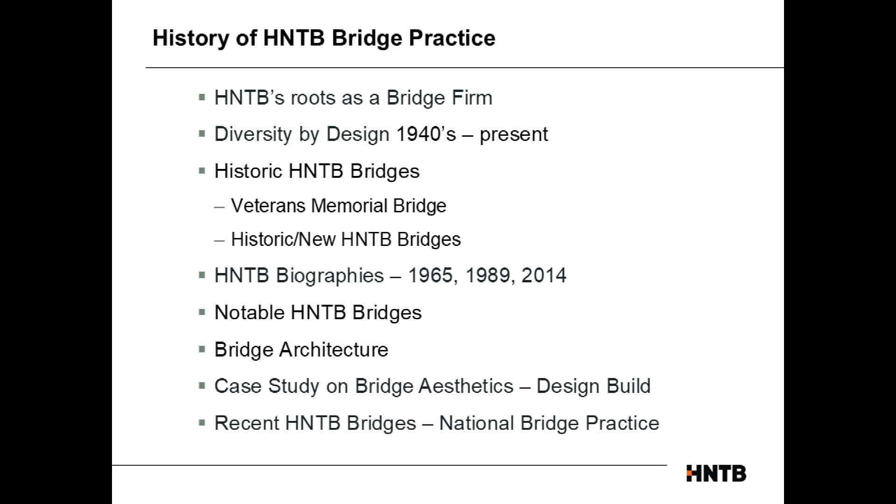So that's where it gets more of the glamour, but then the bridges, which is what I'm going to talk about—HNTB started out as a bridge firm over 110 years ago, and it has diversified over the years. So there is a rich history of bridges and how that firm started. I'm going to follow this agenda, and I may wander off, so let me know if I do. HNTB started out as a bridge practice, and the roots of our practice trace to a bridge engineer named John Alexander Low Waddell. He was originally from Canada, educated in the US, and then worked as a draftsman for the Canadian Pacific Railroad.

He practiced and was also a professor of civil engineering in Japan. But then he opened up a practice in Kansas City in 1886, and then in 1892 he started doing more bridges. Almost all the bridges over the Missouri River at that time were Waddell's influence. One of the famous bridges he did during that time, in 1893, was the South Halsted Bridge.

In Chicago, Illinois. Again, most bridges at that time were railroad bridges. Cars were not invented yet, so the railroad is what kind of drove the building of a lot of the bridges in the U.S.

Again, Waddell, when he was starting his practice, needed partners as it grew. One of his first partners was a gentleman named Ira Hedrick, in 1899. Then in 1901, Ernest Howard, which is the H of HNTB that I'll explain later on. A gentleman named Louis Ash joined the firm, and then Ira Hedrick left. Then John Harrington joined in 1907. He's another name that is also well known in Kansas City. This is John Harrington.

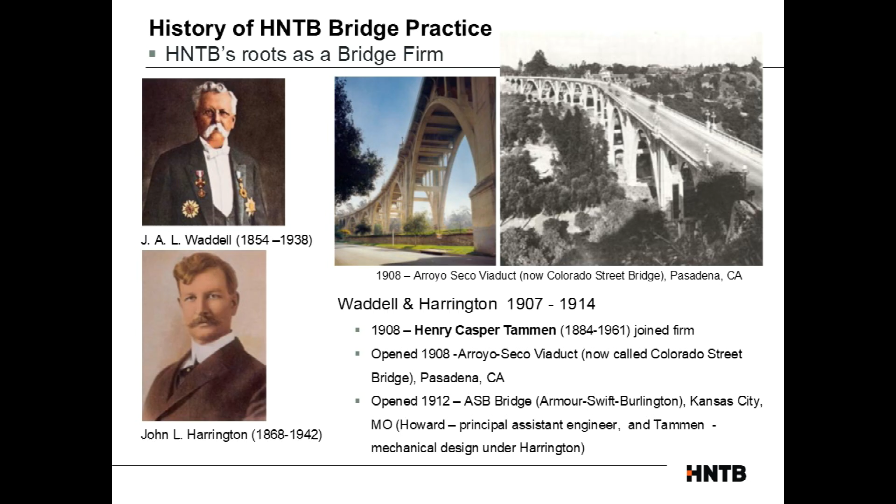This one here is the Arroyo Seco Viaduct, now called the Colorado Street Bridge. This bridge in Pasadena is still standing. It's been featured in several movies—I think the recent one was La La Land, where they were walking along the bridge. And then here in Kansas City is the ASB Bridge.

That's the one that opened in 1912, and ASB stands for Armour, Swift, Burlington. Most people may know, if you're old enough and live in the area, that this used to be a double-decker bridge that served vehicles on one deck and the railroad on the other. So they had the railroad on one area and the roadway bridge on another deck.

It was like that for the longest time, until they built the Heart of America Bridge, and then they ended up taking down that bridge.

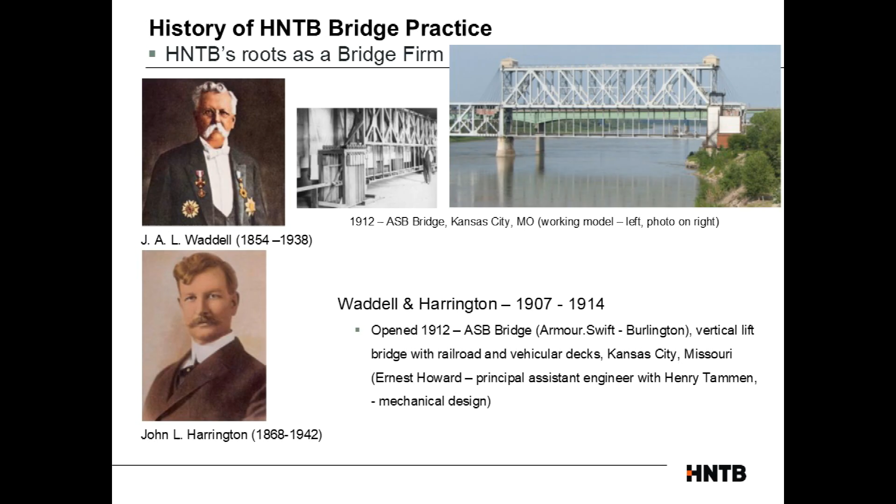They also did this in Cleveland, called the Detroit Superior Bridge. That was in 1917, and currently it's been renamed the Veterans Memorial Bridge. I will say later on I'll talk about some of the restoration work we've done to keep it going.

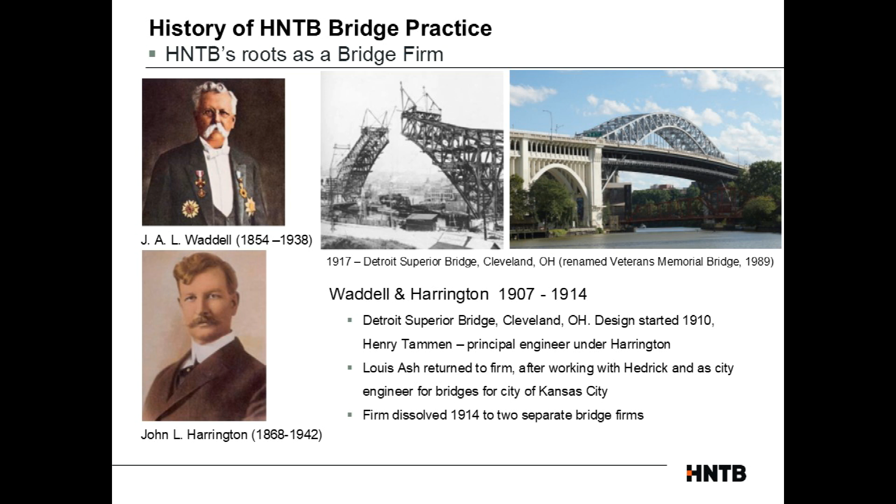So again, that started in 1910, and then Louis Ash was another engineer who left and came back and worked there. Then in 1914, there was a split. You've got two engineers with very strong personalities and egos, and at some point there's going to be a rift, so that's kind of what happened.

Waddell ended up leading the firm. He formed a partnership with his son Needham, and also had a gentleman named Hardesty who worked there, and then he ended up moving to New York. Today that firm is called Hardesty and Hanover, which is also a very premier bridge engineering firm based out of New York.

Harrington ended up forming a firm called Harrington, Howard, and Ash. The original start of that firm is dated 1914. Ernest Howard and Louis Ash were made partners at that time.

And then the bridge there is called the Steel Bridge, in Portland, Oregon, dated 1914. Apparently both HNTB and Hardesty will claim that's their bridge. There's a little bit of a battle, but both websites will mention that, even though Waddell wasn't with that firm anymore, it was designed at that time.

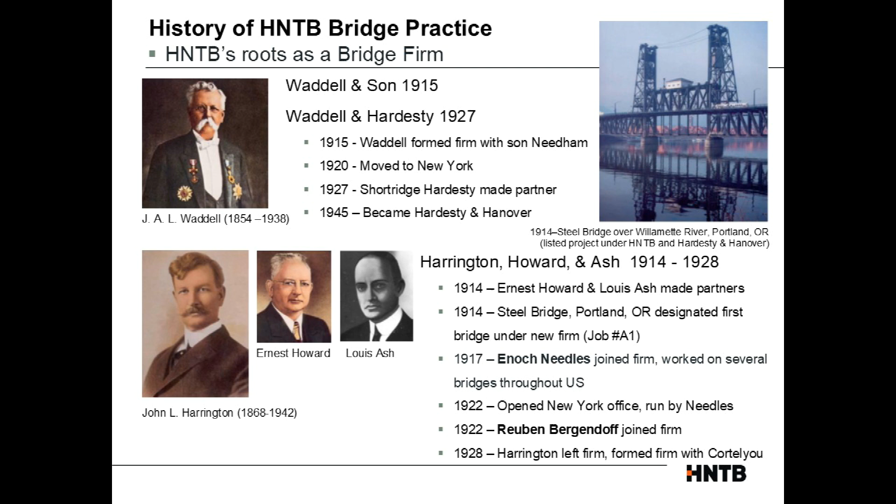Later on, in 1917, Enoch Needles joined the firm, and later Reuben Bergendoff joined as well. At some point Harrington got into a disagreement with the new partners and ended up leaving. He formed a firm called Harrington and Cortelyou that, from 1928 to 2000, operated primarily as a bridge firm but never got that big—mostly local bridges. In the end they were acquired by Burns and McDonnell, so now Burns and McDonnell have a bridge division that was part of Harrington and Cortelyou.

And then the remaining firm was called Ash, Howard, Needles, and Tammen. Tammen was made partner, and then in 1929 the stock market crashed.

And so you're talking about one of the partners, Bergendoff, it's like he had to leave. He was laid off because there was a lack of work.

And this bridge, the Vicksburg Bridge, again, we started doing a lot of bridges over the Mississippi River. And the main partner, Ash, ended up dying prior to the opening of that bridge because he was stubborn and wanted to check certain things when they were building the piers. He ended up suffering the bends from going down deep. That was something that, when you start building bridges, you've always encountered at that time, and people didn't know about it.

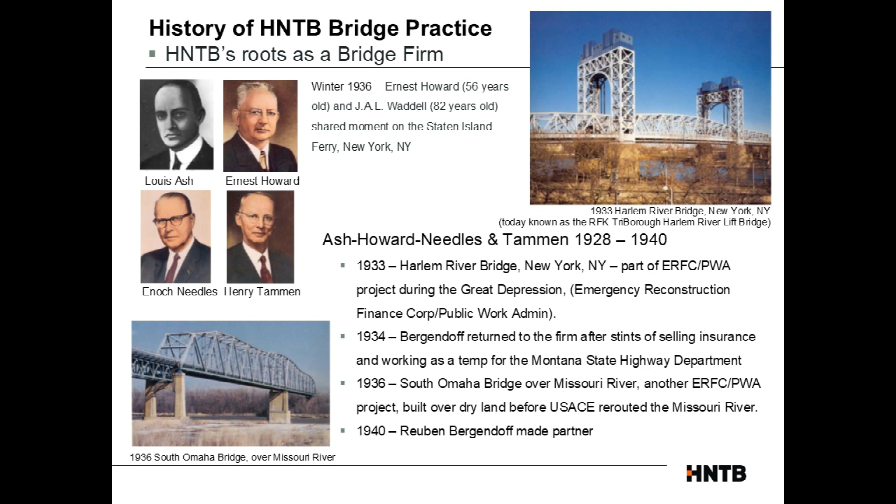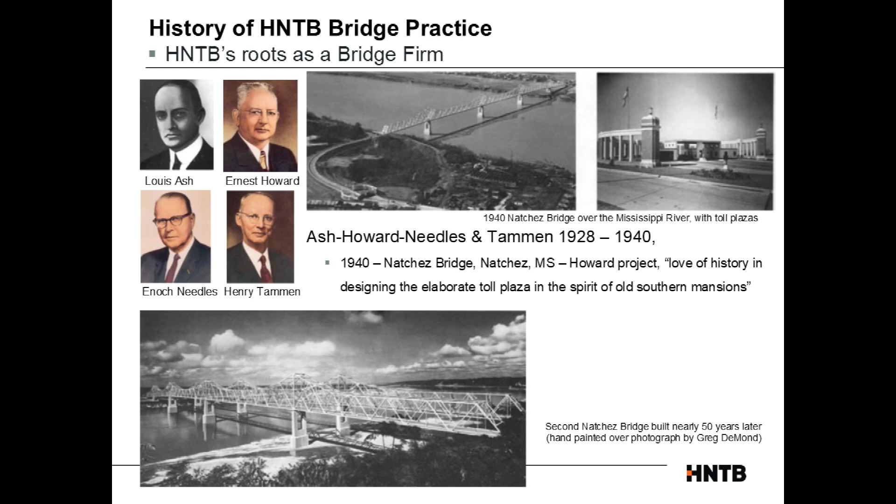This one was actually a photograph, but the bridge in the foreground is hand painted—this is before Photoshop. What they used to do back then is take large photographs, and then have an artist paint directly on it. I'll talk later about Greg DeMond, the bridge architect I worked under, who was very, very talented.

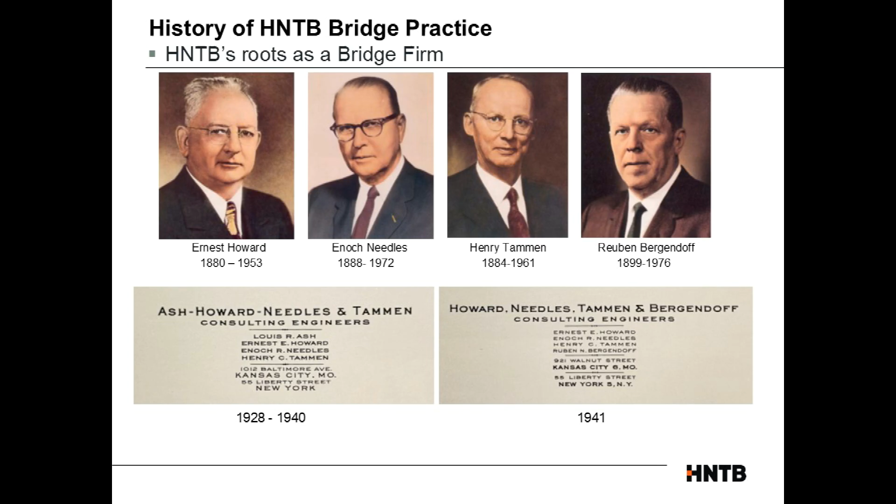So again, in 1940, it was still called Ash, Howard, Needles, Tammen. Since Ash had been gone for quite a while after his accident, they finally named it Howard Needles Tammen Bergendoff, which is what today is called HNTB.

So again, we talked about how to survive as a firm. During World War II, they lost a lot of staff because they had to fight the war, so they weren't doing a lot of bridges—there were very few at all. There's a bridge in Dubuque, Iowa, that they built in 1943.

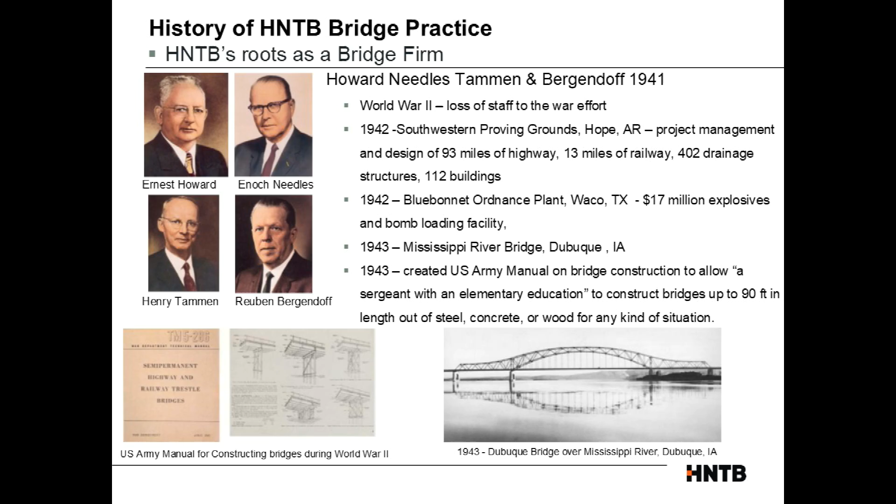But during that time, to keep themselves busy, they also consulted for the U.S. Army on how to build temporary bridges for the war effort. There was a whole manual they produced so that soldiers could take it and try to build temporary bridges over certain creeks. They also worked on certain plants, like explosives and bomb loading facilities—anything for the war effort, just to keep them going.

But then after the war, they realized they couldn't just do only bridges—there wasn't that many projects that were only bridges. So that's when they started thinking about diversifying.

They realized that around 1945 to 1955, there was an explosion of turnpikes being built, as cars were getting more popular and roads needed to be built. So part of what they did was work on turnpikes, ending up working for turnpike authorities throughout the country, including New Jersey, Maine, Massachusetts, and even Kansas. And then President Eisenhower signed the legislation to form the interstate highway system, so they got into doing roads, realizing that was needed throughout the country.

So they ended up creating relationships, and started opening up offices closer to the cities that had all these highway authorities, such as in Cleveland in '54, in Boston, and then Miami and Orlando, and then Milwaukee.

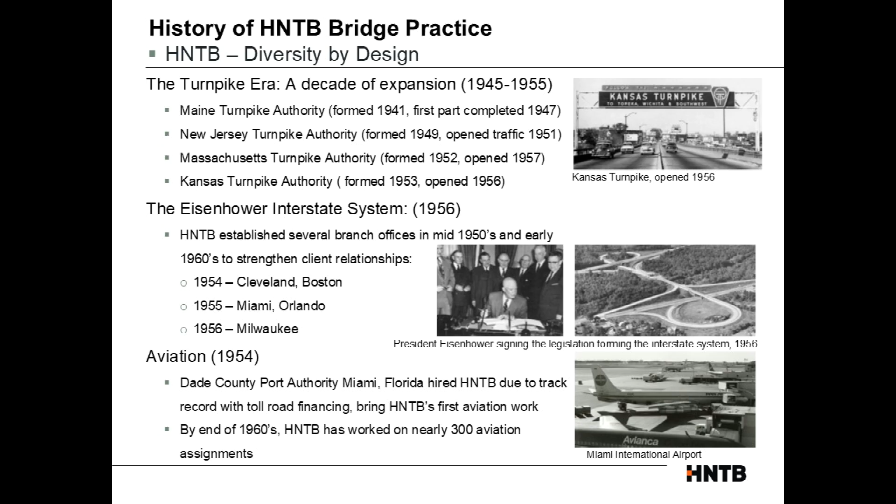For aviation, they started realizing there's a whole new field they needed to get into. It wasn't something they said they'd automatically start doing, like planes, but they had to figure out a plan on how to get going on that. By doing roadways and tollways, that kind of led to runways needed for aviation. So that's how they ended up working on that, and in the end they got into airport design as well as terminal design.

And then the architecture: HNTB ended up acquiring Kivett and Myers, a well-known architectural firm here in Kansas City. They were the ones who did Arrowhead Stadium and Kauffman Stadium. They also did KCI Airport, and did several other projects, and were quite well known. So HNTB decided to get into architecture in 1975.

For rail and transit, they did bridges, but weren't working on rail at that time. So they decided to acquire a firm called Thomas K. Dyer, or TK Dyer, which had done a lot of rail work throughout the country.

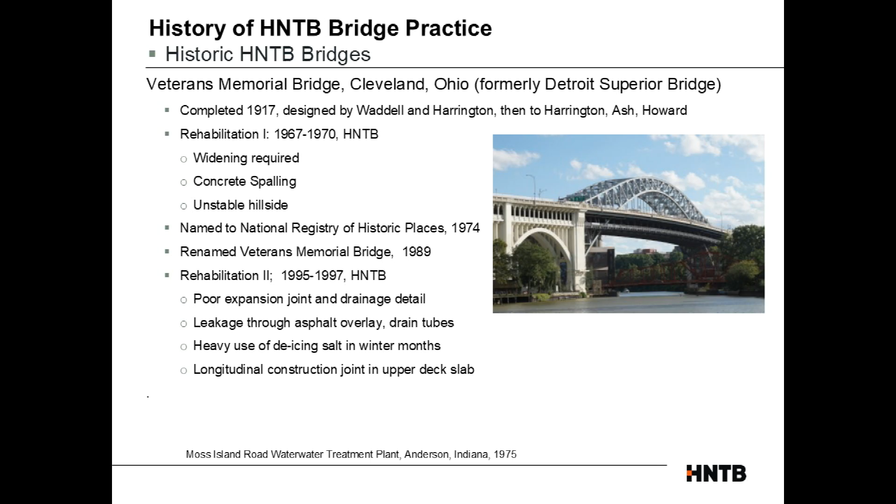So I'll go back to the Veterans Memorial Bridge again. It's an old bridge, but to keep it going, we have renovated it twice. It was completed in 1917, designed by Waddell and Harrington, and later Harrington, Ash, and Howard. They did the rehab in '67 to '70, needing to widen the deck and address issues with the concrete. It was then named to the National Registry, but they did another rehabilitation in '95 and '97.

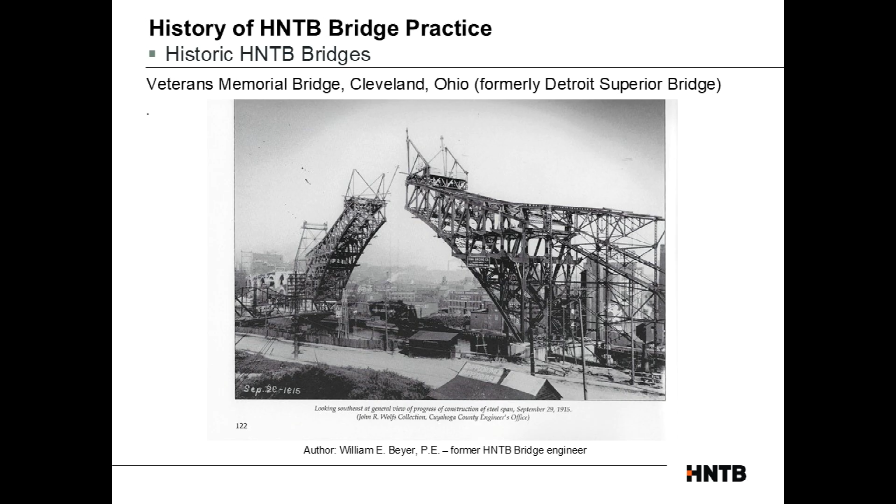There's another bridge engineer I was able to work with named William Beyer. He was working in the Cleveland office at that time, and apparently found a huge collection of photos of the construction just sitting there. He asked for permission to publish this into a book, and so this very thick book showed all the history of when this was built in 1915, showing how the bridge was constructed at that time. And then here you see some of the old photos.

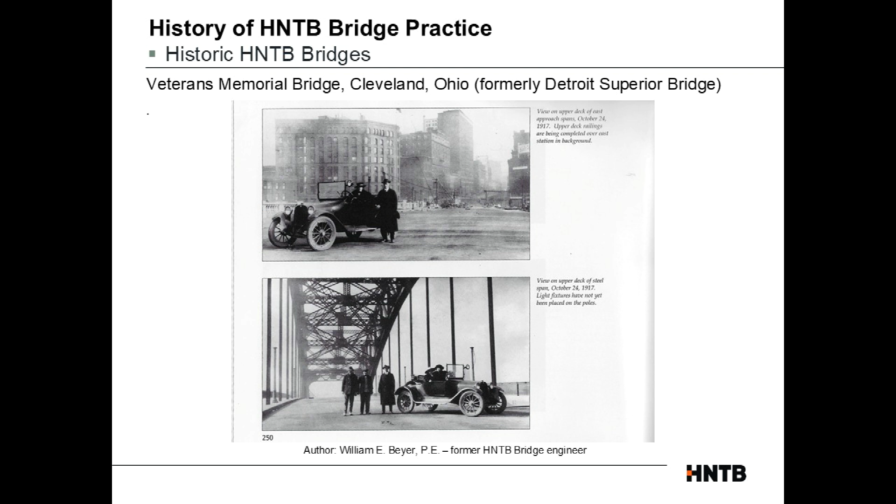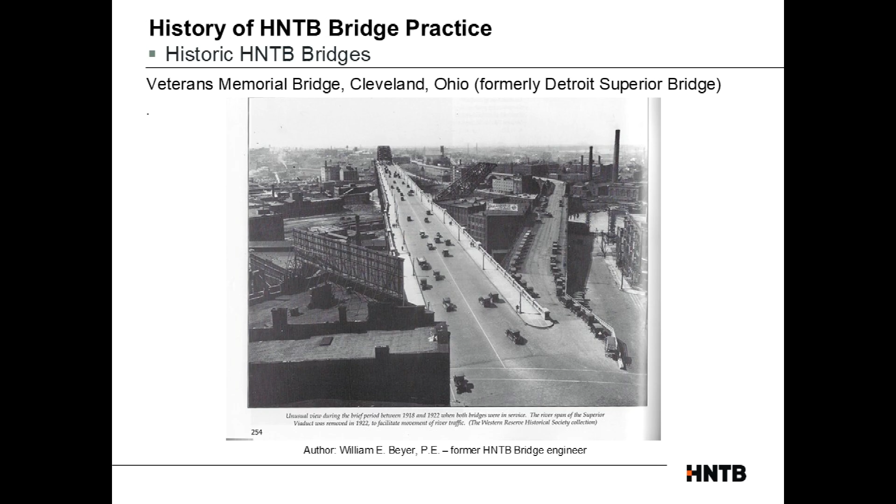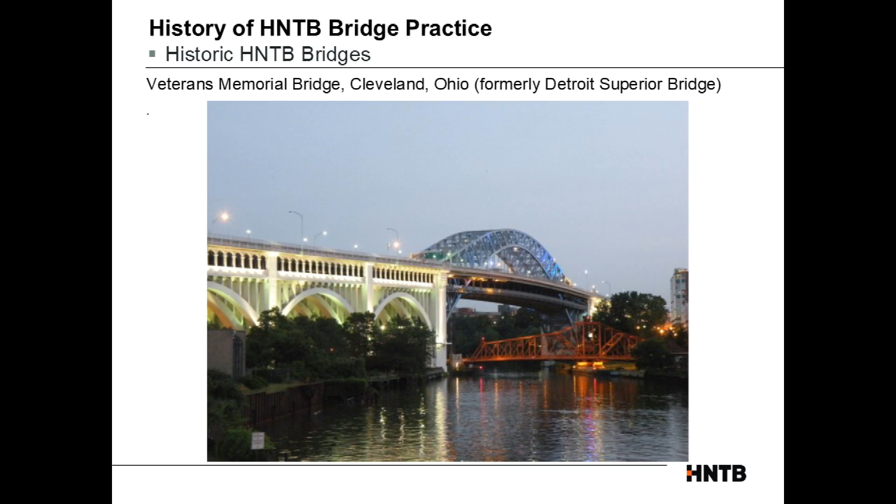It was interesting—I don't know if any of you have seen the latest Superman movie. Probably not. That bridge was featured in that movie because they were using Cleveland as downtown for Metropolis. My wife and I happened to be there when we visited Cleveland, and they ended up closing off the street and put a Daily Planet sign on one of the buildings. So we had to go watch it because we saw that. Then in the movie, buildings were toppling over and collapsing, and most bridge engineers will always say that's not how it works—in movies they always get it wrong in terms of how a bridge is supposed to come down.

So I'll start talking a little bit about historic HNTB bridges. There was a resident engineer named Percy Pennybacker, and he worked on the Vicksburg Bridge that I mentioned earlier. That's a picture of him as a resident engineer.

I did not know that until I made this presentation at HNTB, and then someone mentioned there's a bridge in Austin, Texas named after Pennybacker. He didn't design it, but because of what he did while working for the Texas Highway Department during the war effort, he was interested in welded construction as an alternate to rivets. Back then everything was built with rivets, and he came up with a solution for building bridges better. In the end, it saved Texas a lot of money, so they decided to honor him. There are very few engineers who have a bridge named after them, and he was one of them.

There are others too. At the Brooklyn Bridge, Roebling has a bridge named after him. The Eads Bridge in St. Louis is also named after James Eads.

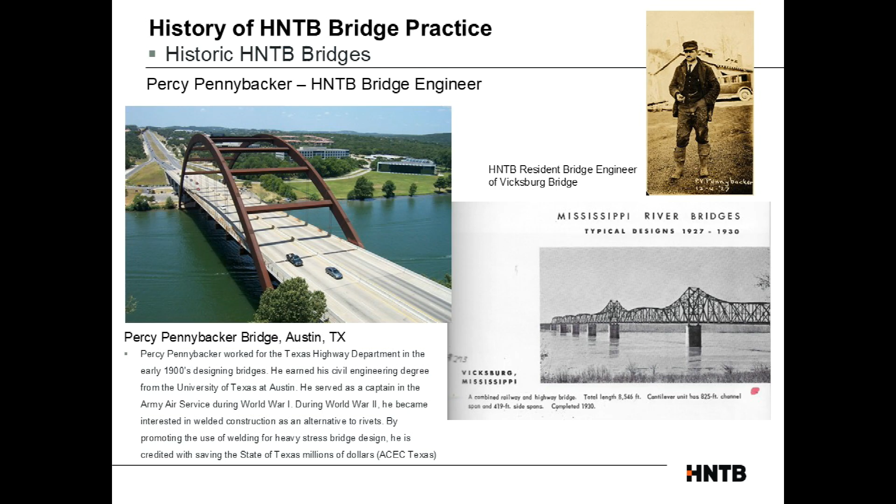Now what I'll do is show a sampling of how we built bridges, and then we sometimes have to tear them down in order to build new ones. So it's not all restoration.

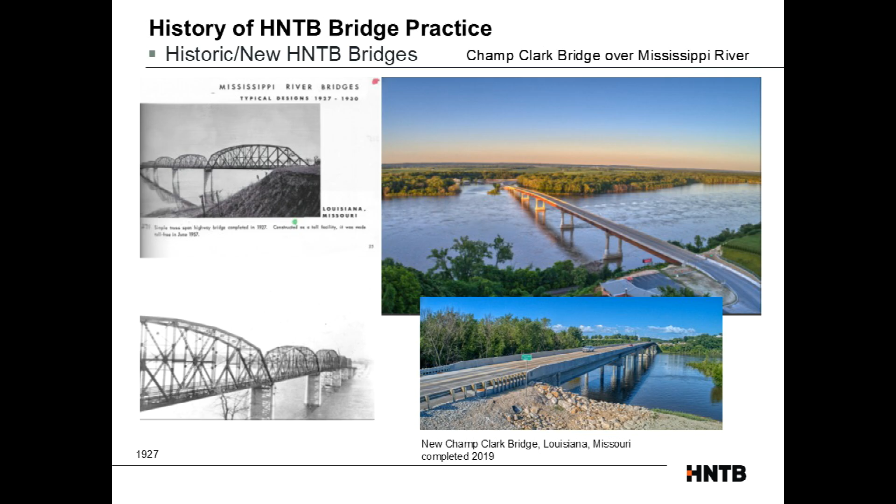This is a bridge called the Champ Clark Bridge in Louisiana, Missouri, also a Mississippi River bridge. It shows it was completed in 1927, but we had to replace it later on when it became structurally deficient. It was really too narrow, and that was part of what we addressed.

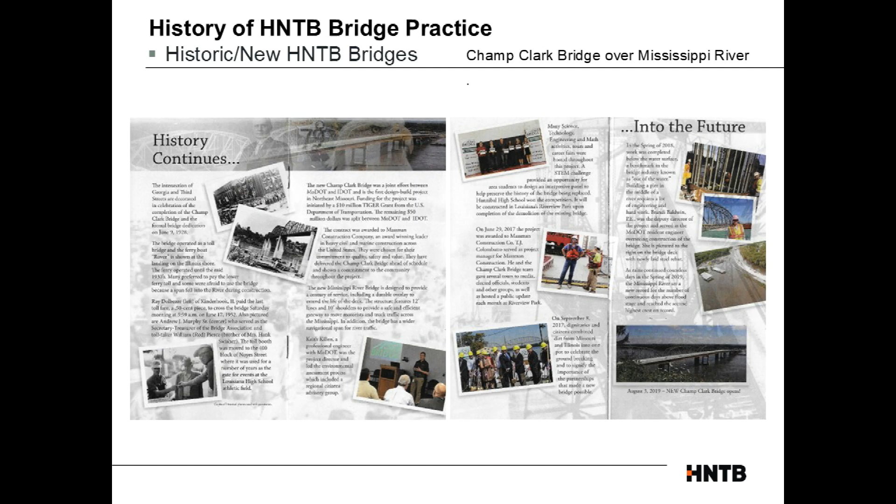I got to go to the dedication of that bridge since I was listed as the bridge architect. I got to sit with the families of Champ Clark, and I think my wife was a little annoyed because I said, oh, I'm not a dignitary, but they said, no, if you're a bridge architect, you should sit with them.

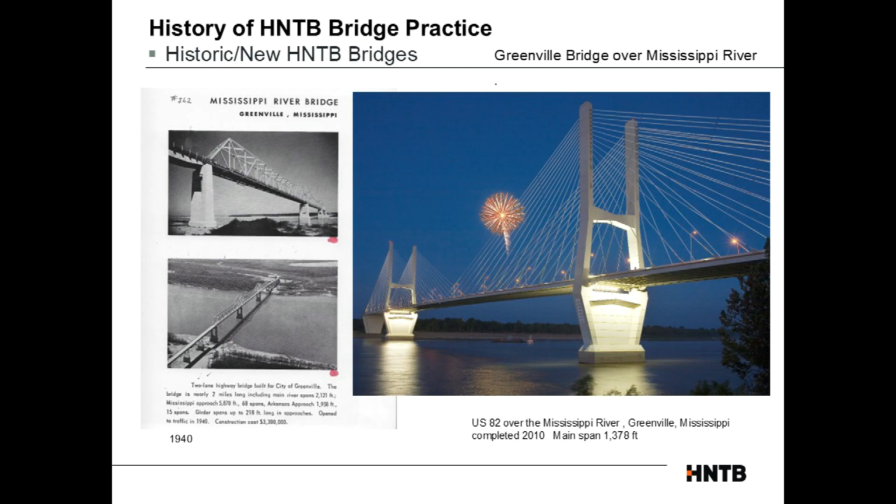We've done more Mississippi River bridges. This is the original Greenville Bridge, a truss bridge completed in 1940, which we had to replace with the new cable stay bridge in Greenville. Part of the issue with many of the bridges we work on is that this bridge was one of the main ones hit by barges a lot, and that was something they had to try to correct. We addressed that with the cable stay bridge by giving it a wider span.

Over in Delaware, we also did the Delaware Memorial Bridge, the original bridge. Similarly, when they needed to do a parallel structure, we duplicated the same design for that.

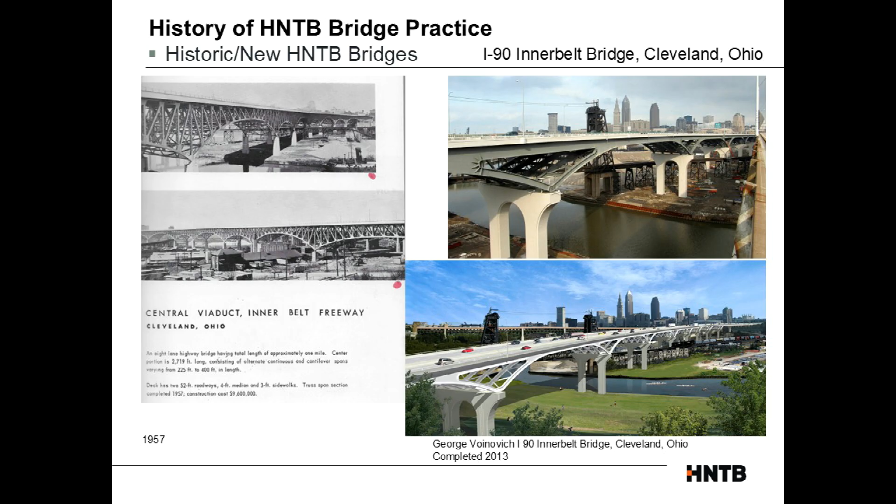This is the Cleveland Innerbelt Bridge, which I'll talk about later. We did the original bridge here, called the Deck Truss Bridge. I wasn't supposed to show that since it's something I'll cover later on.

Here locally, we did the original Broadway Bridge, which was later called the Buck O'Neill Bridge. Just recently, we completed the new Buck O'Neill Bridge. We had to take the old one down and build a new one.

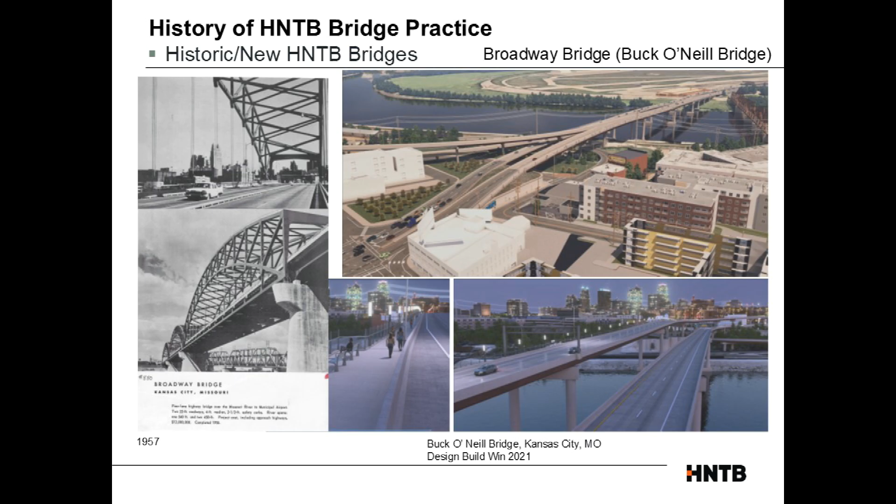I will be honest, I was not involved in the aesthetics of this. The reason is this bridge is more of a highway-to-highway connection. The current Broadway Bridge requires you to come to a stop and then cross over, and I think it used to be an old toll bridge. Since this one was a design-build project, they wanted to keep it within budget and didn't want to spend too much on aesthetics, but they did allow a shared use path for people willing to walk or cycle across. There was a movement to try to keep the old bridge, but unfortunately it was in the way, and there was really no better solution.

DOTs don't care too much about aesthetics, but if the community demands it, and if they're willing to pay for it, that's what will happen.

Good thing I'm not showing this, but the county judge who offered the money was proposing to paint the bridge so the girders are blue, one arch white, and the other arch red, because he wanted to call it the Veterans Memorial Bridge in honor of the veterans. I tried to talk him out of it, he refused.

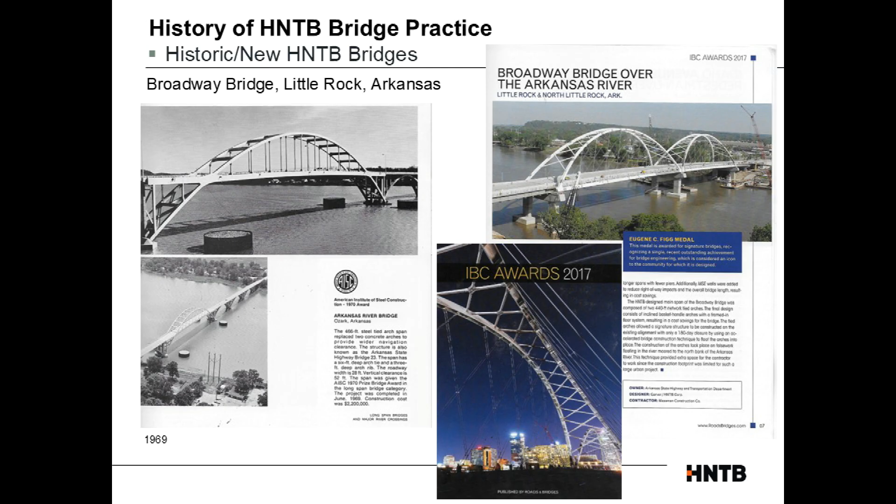So, all right, I'm going to go and talk a little bit about the HNTB history, and I don't know how I'm doing for time.

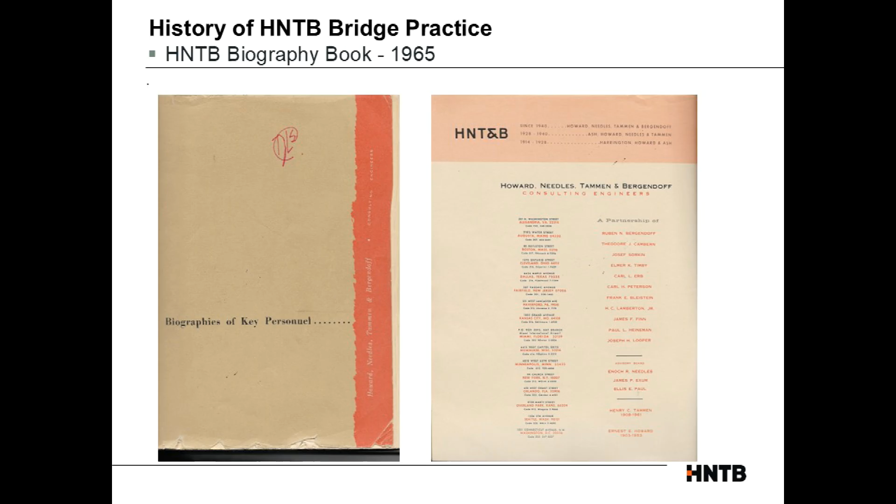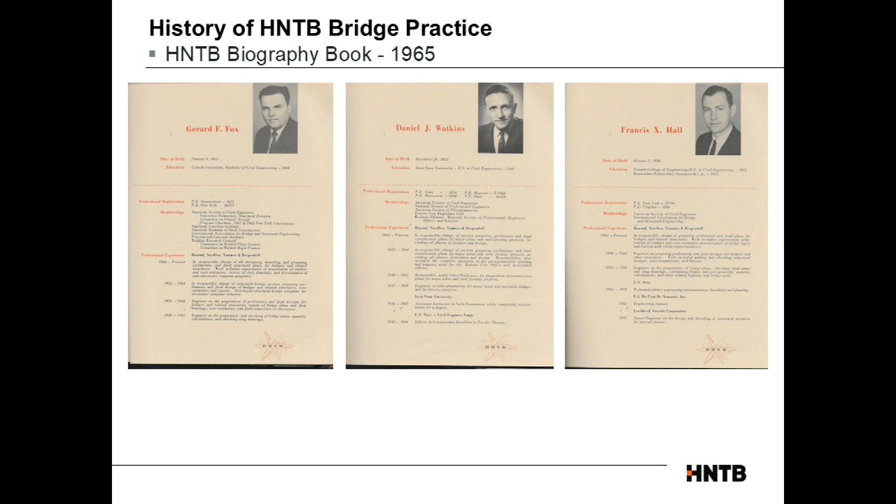This was a biography from 1965, when they had a whole yearbook of all the personnel at HNTB. This was back in '65, showing these gentlemen here, and later, in the 75th anniversary, they were still practicing at that time. Then Harvey Hammond, who was our CEO, was featured in that book as well as in the 100th anniversary book.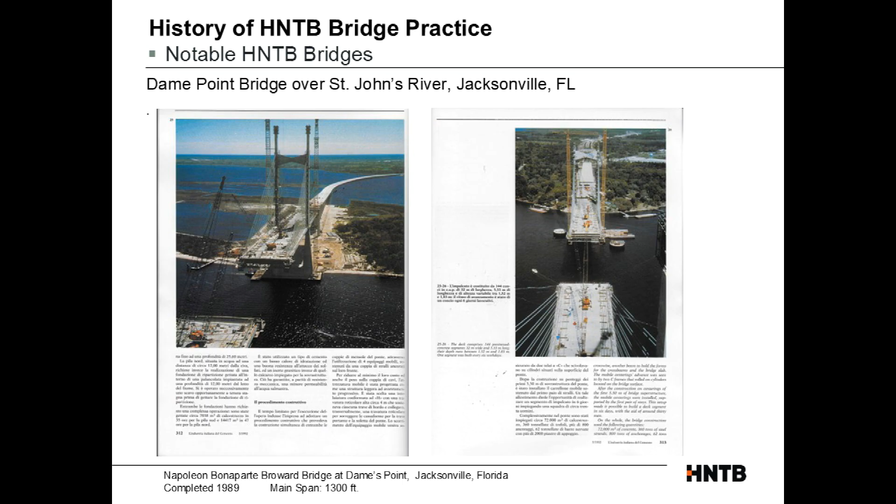Here it shows some of the construction of how that bridge was built. This was featured in a Italian publication, all in Italian, so I couldn't read it anyway.

This is the Leonard Zakim Bridge, which you mentioned. My role was as the visualization architect for the Leonard Zakim Bridge. HNTB was doing this as part of the Big Dig project. I started out working on computer animation at HNTB, and this was the first major bridge I worked on, so we had to do a 3D model of this bridge.

Looking at this now, the graphics are pretty outdated because it was back in '95, '96 or so. But here, this is the 3D model that we did.

Here's the completed bridge, and it has won a lot of awards. At that time, it was considered the widest cable stay bridge in the world because it carried 10 lanes of traffic, but the span is pretty short, only 745 feet. For a cable stay it could really span longer, but there wasn't a certain need to do that.

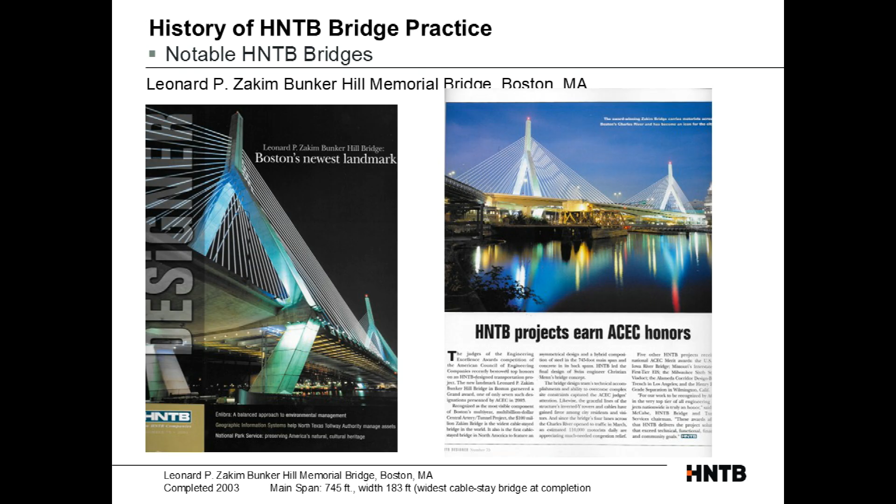It was also featured in this book. Part of the 3D modeling I did ended up getting a lot of requests from all these publications from media.

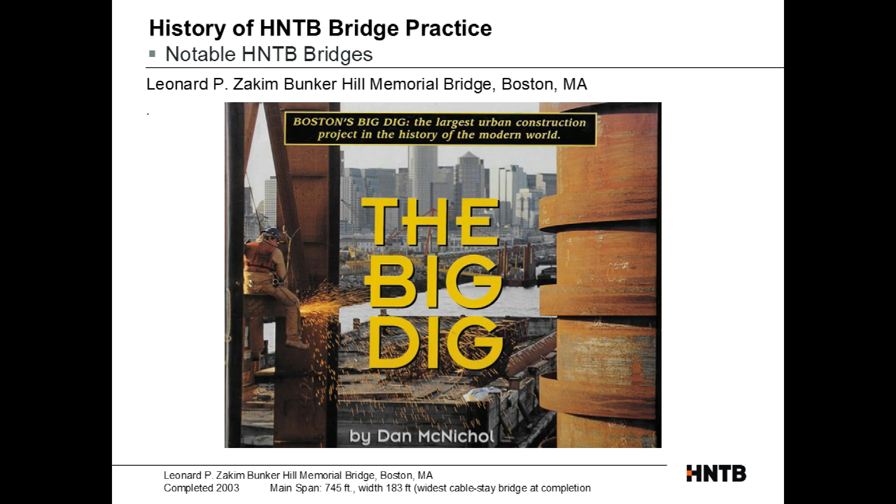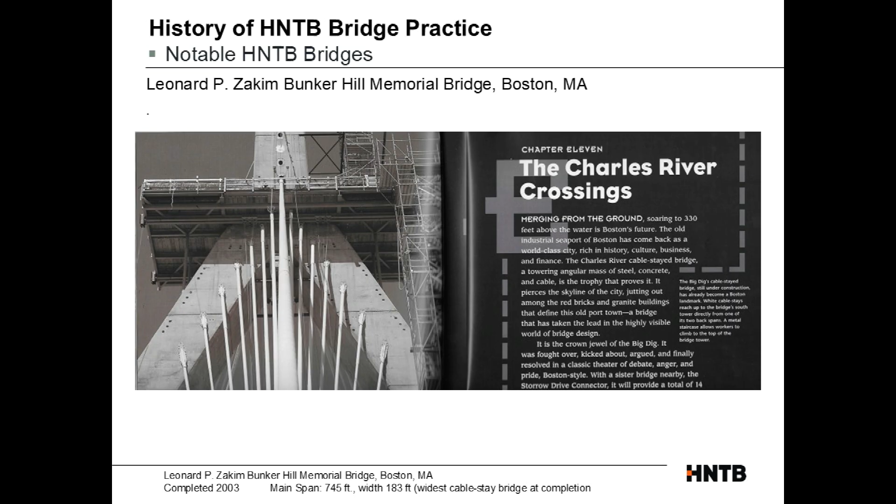Because this was shown at the AASHTO conference, this annual conference, book publishers asked about the images, and so here is the rendering that we did that was featured in that book.

And then later on, this is the Travel Channel, but originally I was contacted by the History Channel because they were doing a documentary on the Big Dig. They said, oh, we saw this animation at this conference, can we get a copy of that? I said sure, yeah, we can go ahead and do that. So we did that.

And then during the construction, I also got a call from Homeland Security. It was the Secret Service. They said, oh, I heard that you have a model of Boston in that area. And this is, again, before Google Maps and all that. They said, can we get a copy of your model because the Democratic National Convention will be held at the Boston Garden. So I ended up getting this correspondence, and I said yes, we have the permission, and I got the letter from them, sealed, saying they won't use it for anything else. But it was kind of neat.

And then years later, when the bridge was still under construction, the Travel Channel contacted me because they do a 10 best beaches, 10 best resorts, and they wanted to feature the Zakim Bridge as one of the 10 best bridges in the world. So we got a lot of famous ones like the Brooklyn Bridge, the Golden Gate Bridge, the Sydney Harbor Bridge, but the Leonard Zakim was the only one that was not completed. They said, hey, I saw that you had an animation of this, can we borrow it? And sure enough, we did that.

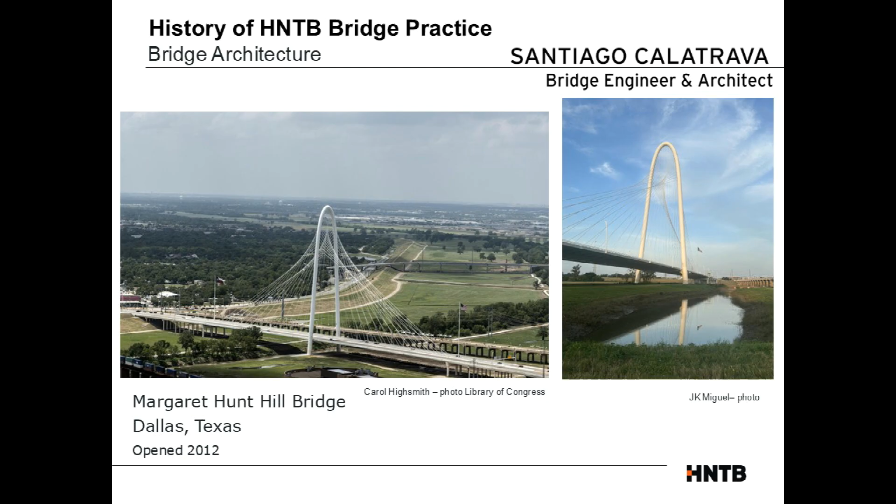This is one of his famous bridges that he did in Dallas, Texas, called the Margaret Hunt Hill Bridge, again named after someone in the Hunt family of Lamar Hunt fame. Calatrava did this design over the Trinity River, and instead of the cable stay bridge being the standard stays, he did something that's probably not the most efficient in terms of design for a cable stay. He ended up reversing where the cables go from here to there, usually it's the other way around, but he switched it to create like a spirograph type form. You had to have a tower that was a lot taller, but then it gave it a cool factor, and now it became also a symbol for Dallas.

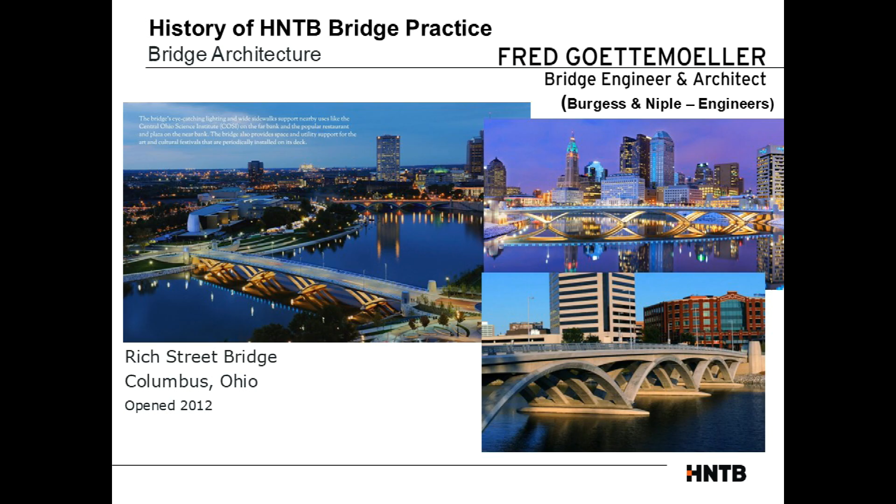There's another bridge engineer and architect named Fred Goettemoeller. He may not be that well known, but he has been pushing aesthetics on bridges for quite a long time. This is one of the bridges he did in Columbus, Ohio, called the Rich Street Bridge, where he incorporated all these arches that give it some certain rhythm.

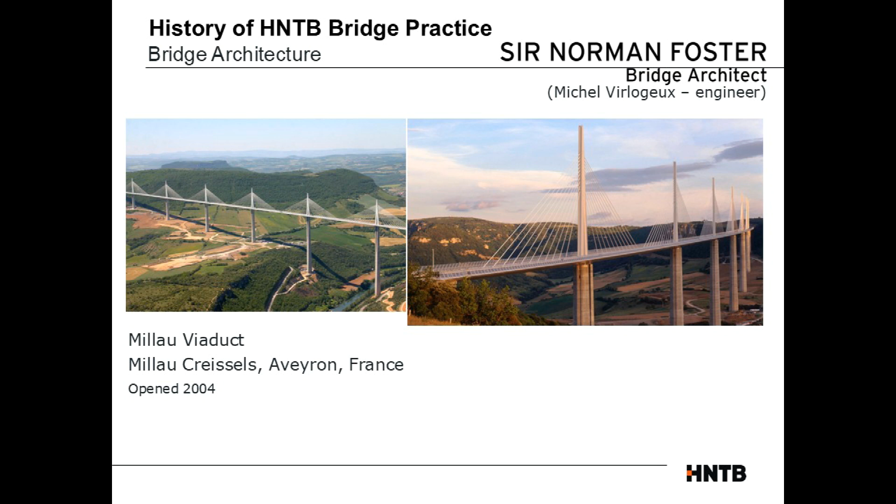And then I'll name certain architects that, if you're in the architectural world, you might recognize, and probably not. Norman Foster is a British architect that was involved in what is the tallest cable stay bridge in the world, in France. Every time I watched the Tour de France, they will always show this bridge in the background. Another architect I respect is a woman named Zaha Hadid. She was a very talented artist, doesn't do anything traditional. I don't know how to say it, but she pushes the limits on structural design.

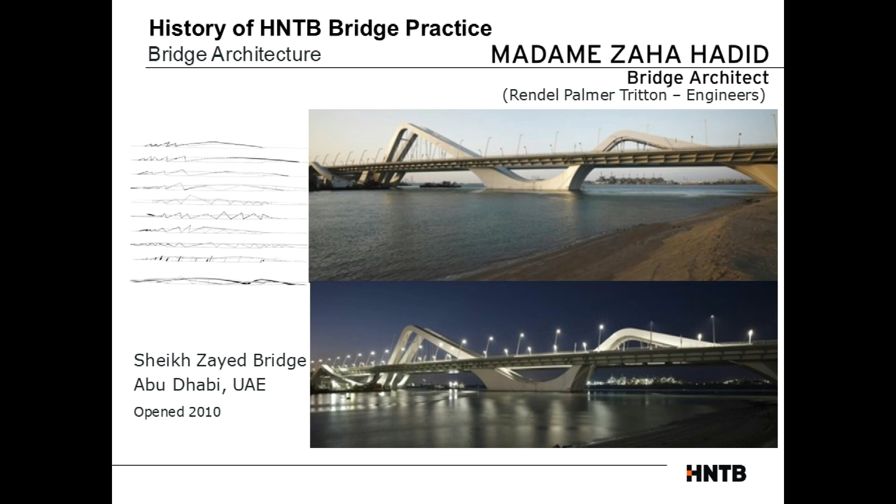But then they are always very innovative. She did a lot of buildings for the London Olympics, but she has also done bridges. This is one of the bridges she did in Abu Dhabi. Instead of the usual standard arches, she wanted to push the envelope and make it like a waveform. The budget was really huge. Here it shows some of her sketches. That's something architects do, they love to sketch. These are some of the sketches she had of her ideas.

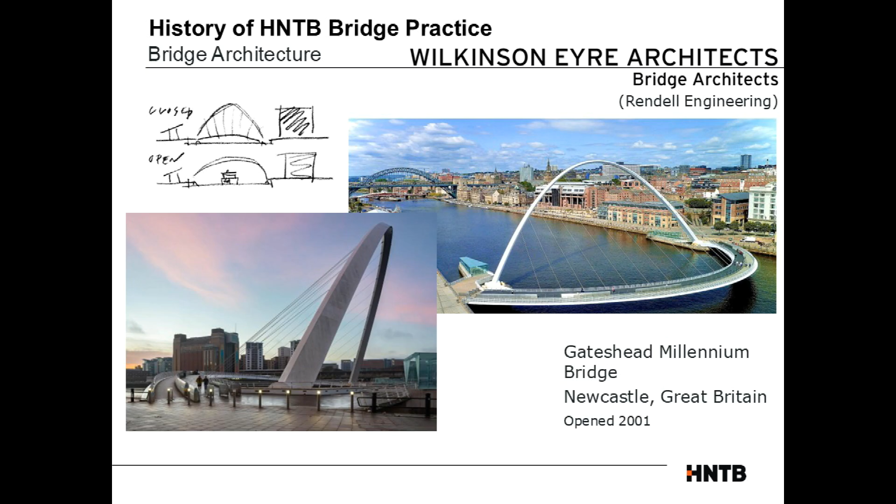Then this is another firm named Wilkinson Eyre, another British firm, that was innovative. This is a pedestrian bridge that kind of tilts at a 45 degree angle to allow ships to go by, so it doesn't have to go all the way up, but just kind of hinges enough for any boats to come in. That's his napkin sketch of this idea.

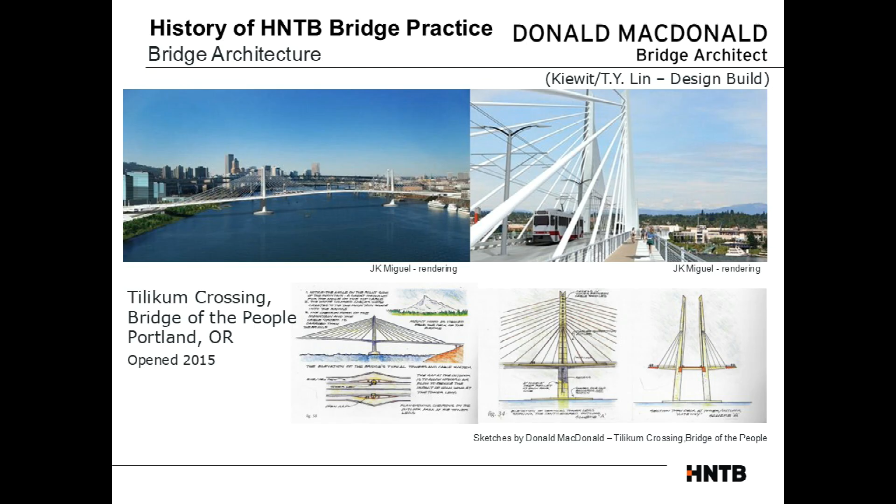HNTB and myself were involved in the preliminary design of this. These are two of my renderings - photo match renderings, but with a 3D model that I created into the photo. There was an architect of record named Donald MacDonald, who was responsible for some of the final designs. He created a book on that, showing all his crayon drawings of how he came up with the concepts.

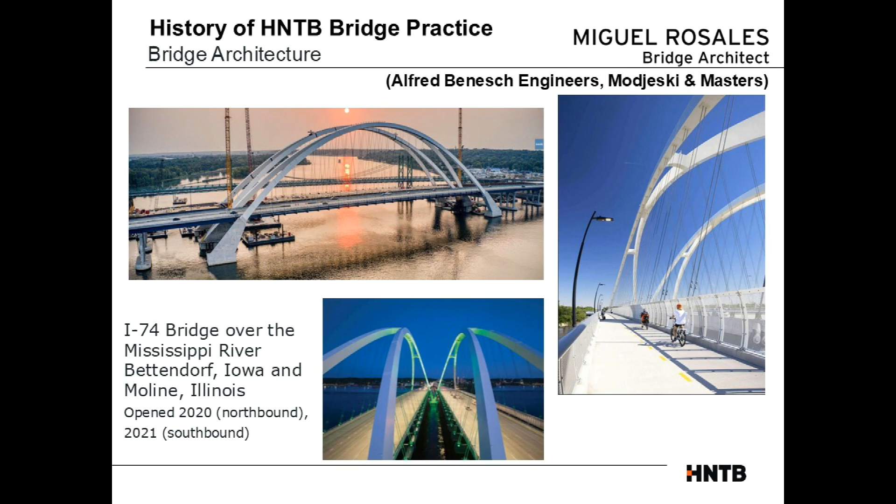And then if you go to the Quad Cities, there's an architect named Miguel Rosales. He's also an MIT alum, and he has worked on a lot of bridges throughout the country. This is the I-74 bridge that he was responsible for.

Oh, and then this guy named Frank Lloyd Wright - hopefully most people know who he is, because he's one of the most famous American architects who ever lived. He designed over 40 bridges, but only 2 got built. One of them I think is at Falling Water, it's a very short bit, and there's another bridge he did. But apparently he had a proposal for a bridge over the San Francisco Bay called the Butterfly Wing Bridge. Here it shows his drawing of the elevation view and the plan view.

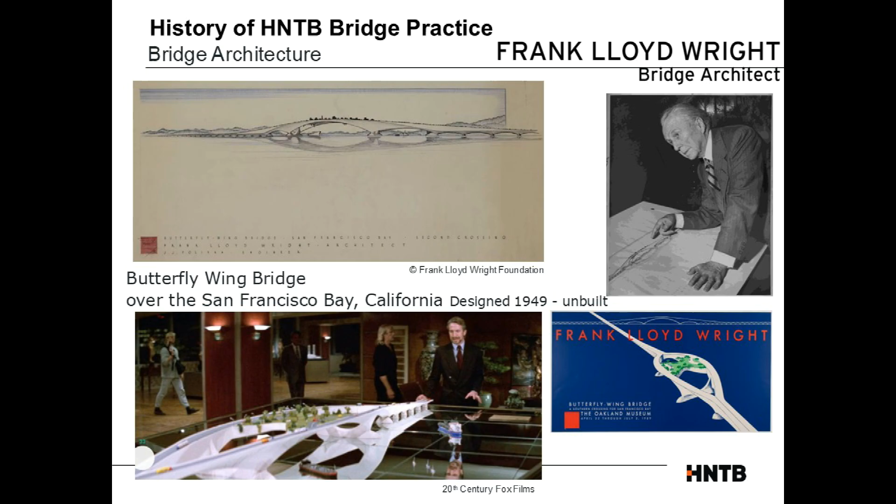I didn't know this until later, but if you've seen the movie Die Hard with Bruce Willis, the very first one, they were at the Nakatomi Plaza building, and the villain named Hans Gruber, played by Alan Rickman - apparently, I did not know this until later, there was a model of Frank Lloyd Wright's bridge that was used in that movie. They contacted Taliesin to say, hey, can we borrow your model of Frank Lloyd Wright's bridge for use in this movie? And that's what they used it for.

Okay, I'm going to try to move a little bit faster.

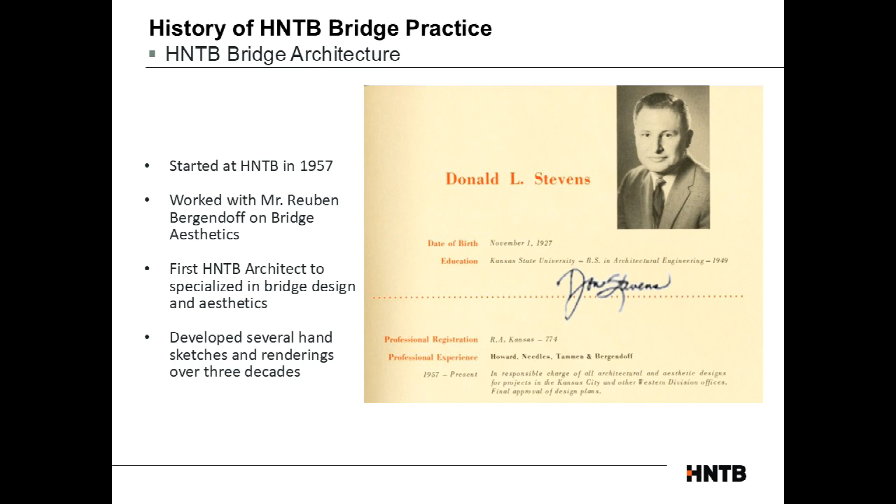At HNTB we've always had a bridge architect on staff, so I'm going to talk a little bit about the history. This was a gentleman named Don Stevens who started at HNTB in '57, and he worked with Bergendoff, who was the B in HNTB, and he was the first bridge architect. When I say bridge architect, this is someone who works solely in the bridge group, doesn't do buildings, and works directly with the bridge engineers on the aesthetics.

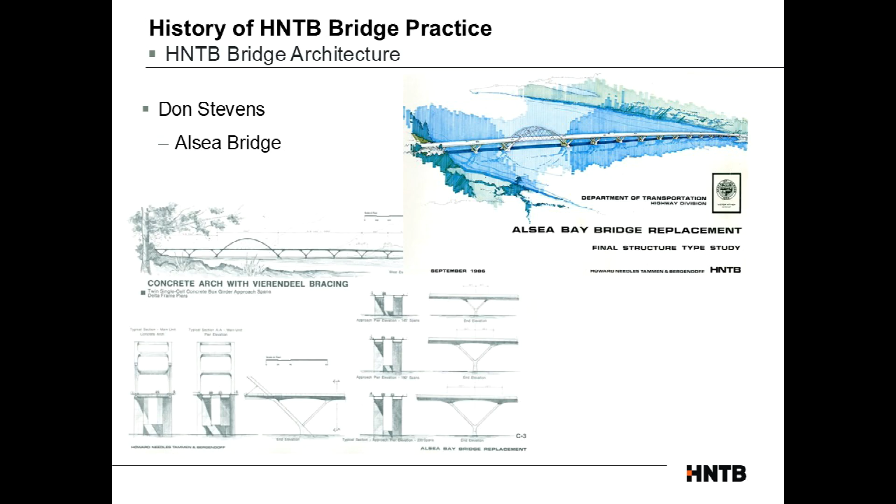So this is what I call the three generations of bridge architects. Don Stevens was practicing from the 50s to the 80s. Greg DeMond, who I mentioned before, worked from the 70s to the 2010s, and I've worked from the 1990s to the present. This is some of Don Stevens' concepts on a bridge - he would come up with all these different ideas and concepts, all hand sketched to develop certain ideas. And this is the completed bridge, the Alsea Bridge.

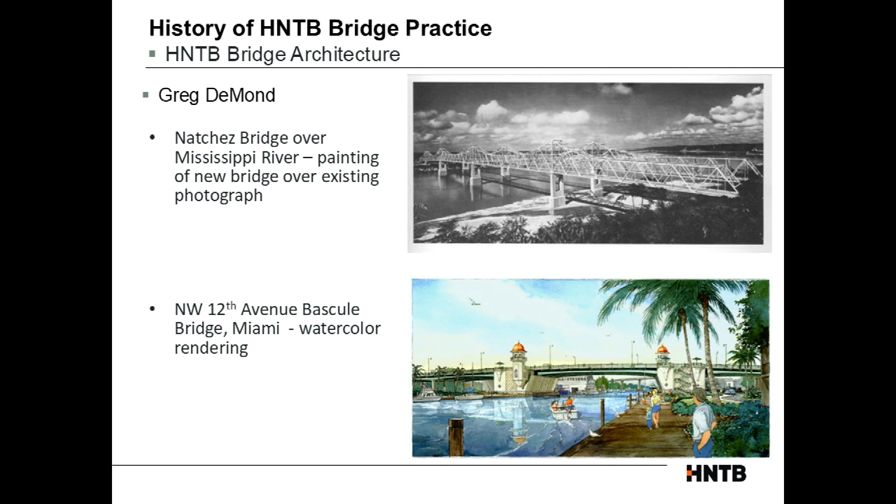And then Greg DeMond, he worked under Don. Before that, he was the artist that did that hand painting over the photograph. So I kind of mentioned about the Natchez Bridge, but he also did watercolors.

But then if you go to the Wichita area, he was also the bridge architect for the Wichita Pedestrian Bridge. It's a really nice two parallel cable-stayed bridges. But here you see his hand sketches - these are the concepts he had of what the towers would look like, how the base would look like, what the handrails would look like.

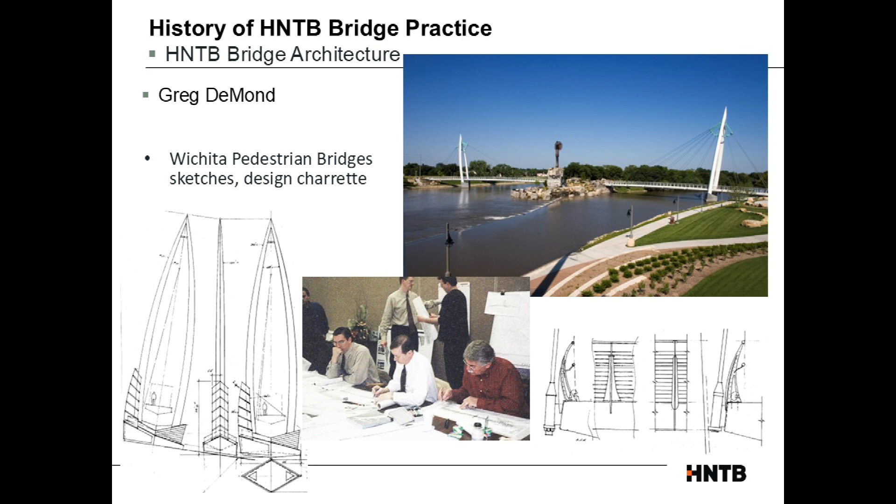And this was in a charrette where they meet with the clients to come up with some ideas. This is where the architect comes in and starts hand drawing things really quickly.

He also worked on the Tacoma Narrows Bridge, not the one that fell, if you know about that. You may have heard of Galloping Gertie, that in most science classes - that was a bridge that when the winds really hit, it started waving and then it crashed down. And then this was what they ended up building.

HNTB was asked to do an addition to it, to make another parallel structure, but then it was going to be a different type of suspension bridge. So Greg had several ideas of what the towers would look like in order to respect the older bridges. He ended up doing a cross bracing of that.

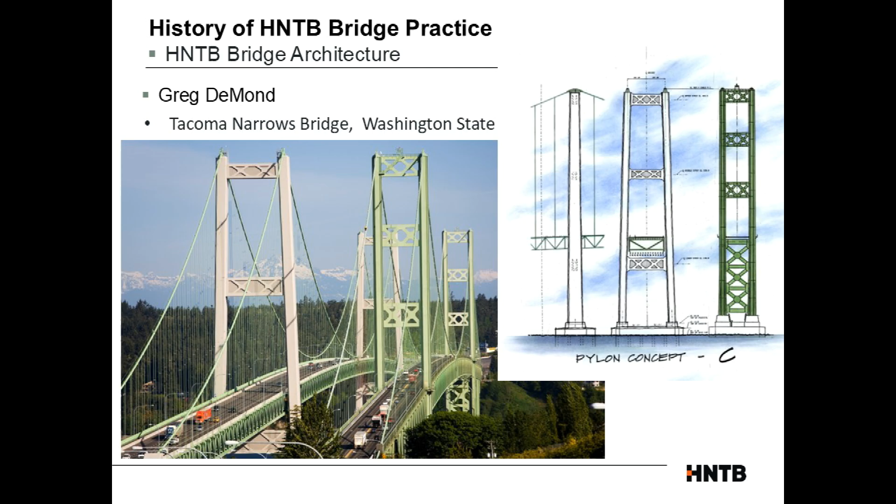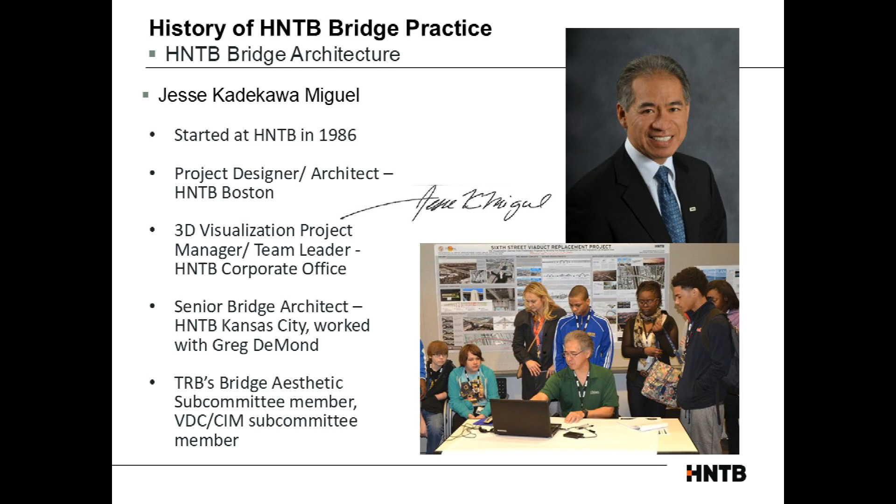So then here is myself - my hair was a little darker back then. But again, I've worked with Greg on that, and here was when - this is something I enjoy - I like to go to schools and do presentations or charrettes to tell them what HNTB does and what bridge architecture is.

So I kind of mentioned the Zakim Bridge before. If you go to St. Louis, this is the Stan Musial Veterans Memorial Bridge, or what's called the I-70 Bridge. Again, I worked on that, did the 3D modeling of that, did also the aesthetic lighting for that. And they had to do the opening in February, so there was some ice and snow all along there, but we kind of survived. We also did the Golden Gate Bridge seismic retrofit.

After all the earthquakes that came in, HNTB was asked to retrofit it, make it so that it'll be earthquake proof. We had to show an animation to show the sequencing of how you would end up building the deck, since apparently you cannot shut the bridge down completely. They can only work at a certain time at night, closing off certain traffic in order to replace the deck, and then they had to reopen it the next day for all the commuters.

So we ended up working on that. I also worked on what they have currently built, which is called the SDS, which stands for Suicide Deterrent System. The Golden Gate and several bridges were known for people committing suicide, and so what they have done is implement a net underneath the deck. What they're hoping is that it will deter people - hopefully people trying to jump off won't be able to go straight down, that the net will catch them until people call for help.

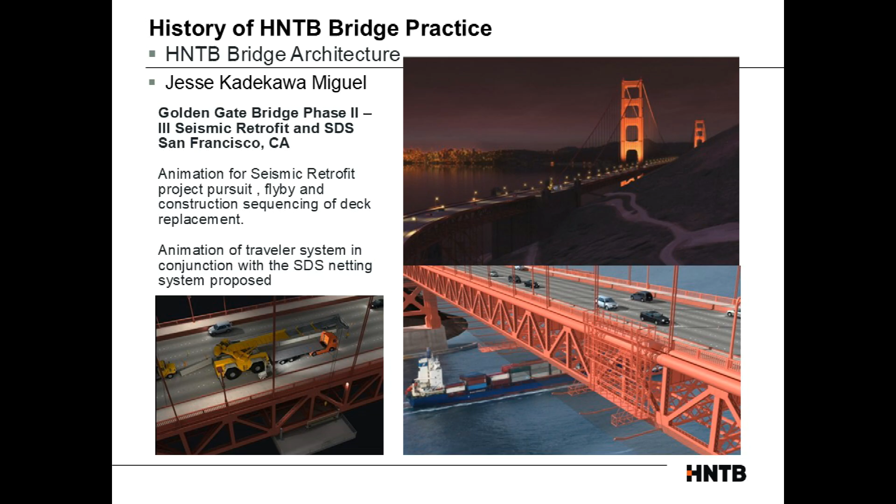I had to show what's called the traveler - they have to do inspections of bridges, and so there's a traveler system that they had to incorporate that goes up and down and checks on the bridges.

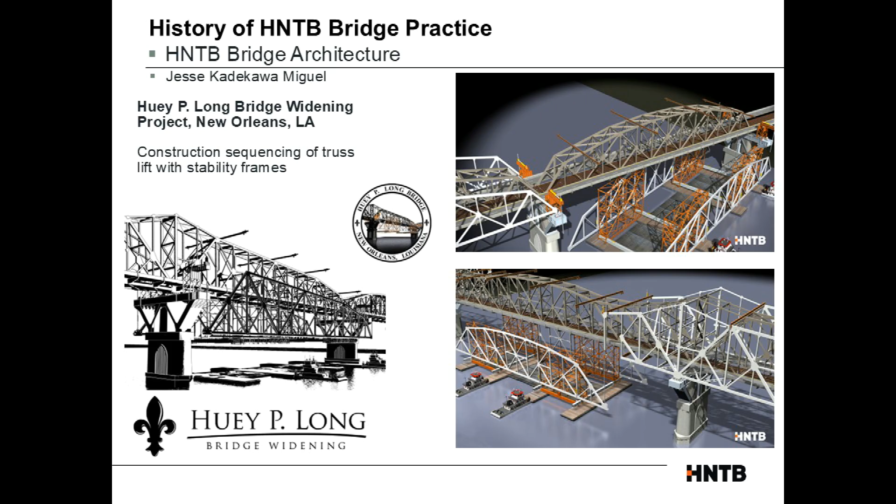And then in Louisiana, in New Orleans, we did the addition to the Huey P. Long Bridge, which I don't think this animation will probably play, but we had to show how we would add on to the existing bridge.

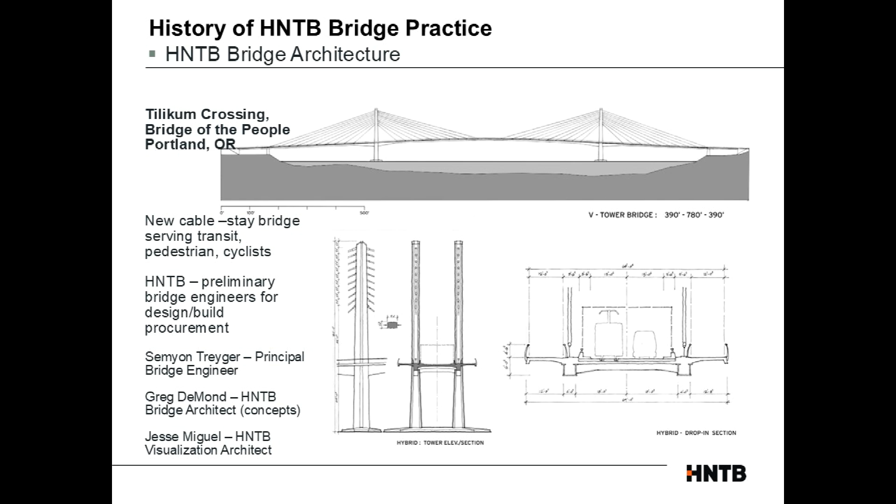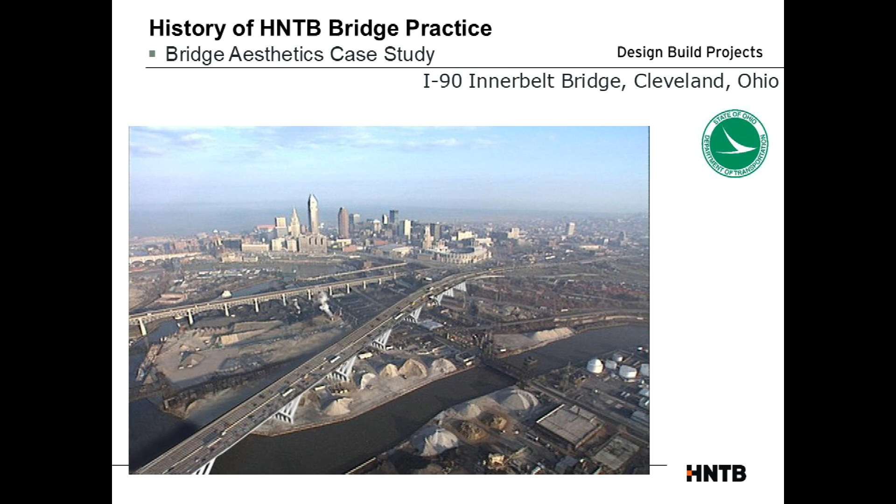So I'm going to talk about a little case study. And again, I've already showed you the bridge already, but this is the Innerbelt Bridge in Cleveland, Ohio. And the same thing, HNTB did the original bridge. I think I told you it was a deck truss bridge. But then again, that was structurally deficient, so they had to replace it.

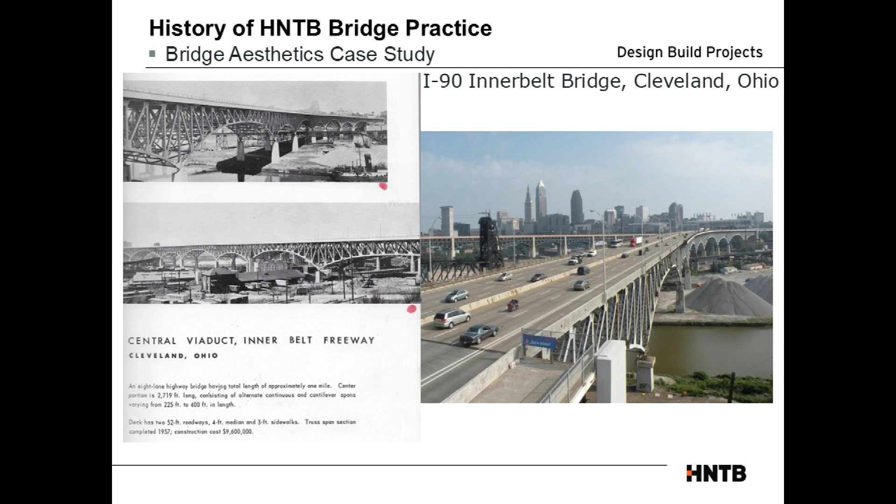A lot of the bridges that needed to be replaced - part of that is when they discovered some of the issues with design. I think the I-35 West Bridge in Minnesota, that's the one that was kind of overloaded. There was a gusset plate issue, and then it kind of fell. So a lot of the bridges that were under that design, they thought they had to replace. So this was rather interesting because it was a design-build project, meaning you had to team up with a contractor in order to go after the job and win it.

Usually I do a lot of renderings, but on this project, they requested that each team submit 3 renderings. One of them had to be a night shot. It was going to be a public survey where they determined what they liked and didn't like, and apparently that was worth 5 bonus points for aesthetics. They had to do that a month before their selection.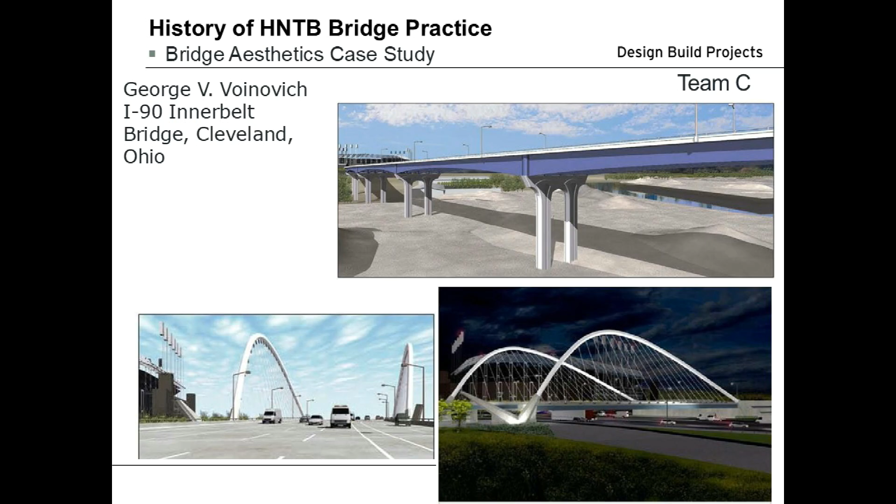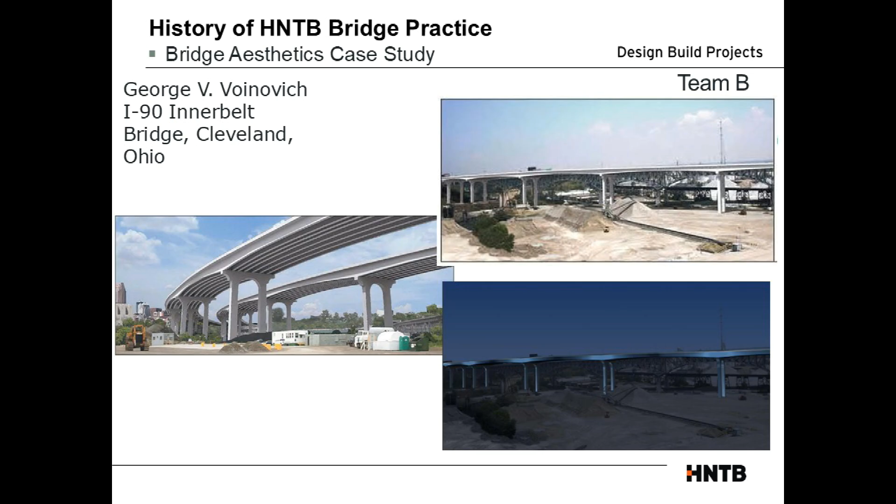So I'm going to show you 3 teams, and they were not told what was what team. This is Team C, showing their 2 renderings of what the bridge would look like, including a night shot. This is Team B, same thing. The requirements were that it had to be a steel girder bridge, and from the piers, the girders had to be curved out—you couldn't have a straight girder. And then Team A, which I think I've already shown you.

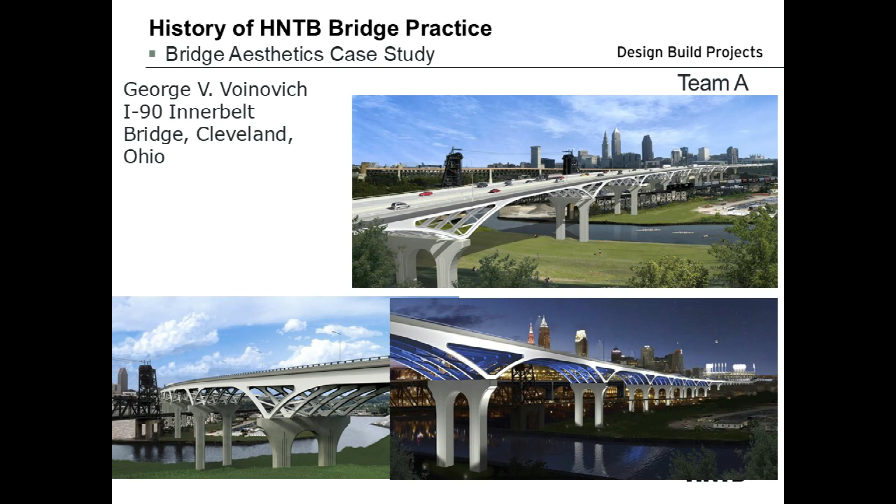These were my renderings of this project. Here's what the scoring came into: Team B, the first team, only got 1 point. Some of the comments said there were no significant strengths, and in the public survey they only got 37%, so it didn't grade that well.

Team C was the middle one that had the arch, and they only got 2.5 points. The Walsh team, which is also part of HNTB, ended up getting 5 points. So it was part of the reason we got selected on the aesthetic points, but of course the team also had to come up with a price, and I think our structural team came up with a price that was competitive. The first team dropped out as soon as the public survey came out—they just dropped out of the whole project.

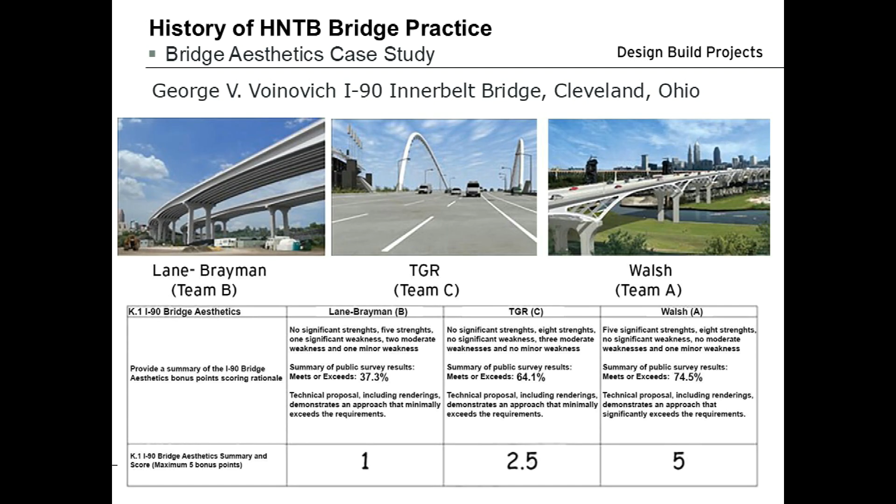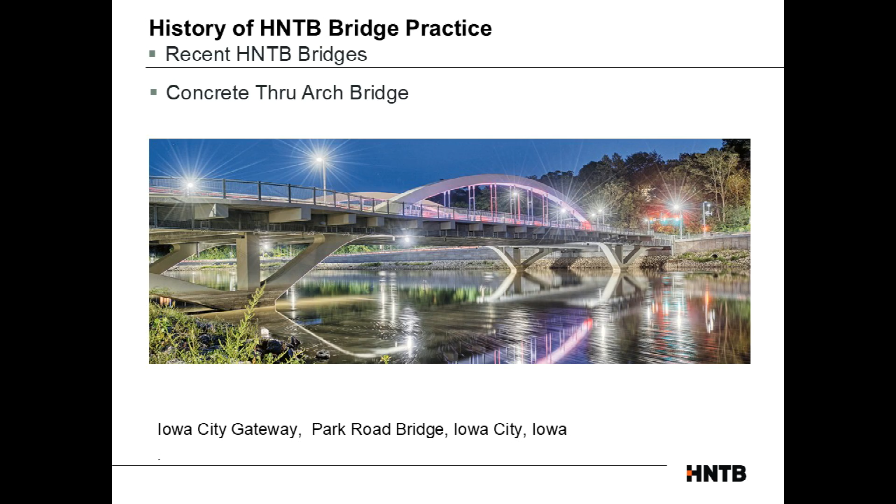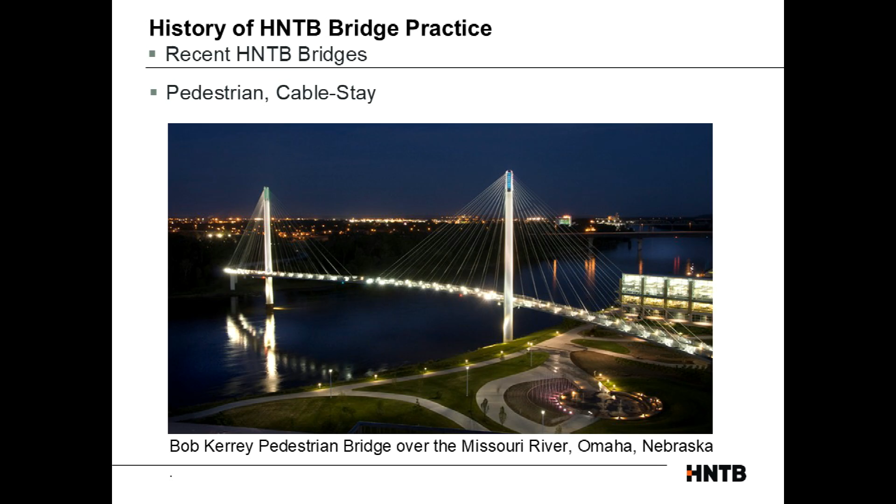Here are some other HNTB bridges—we don't do only one type of bridge, we do several. If you go to Iowa City, this is the Park Road Bridge. In Omaha, we did the Bob Kerrey Pedestrian Bridge, a cable stay bridge that goes over the Missouri River in an S-shaped plan. We just recently completed an addition, another connection that connects to the downtown area.

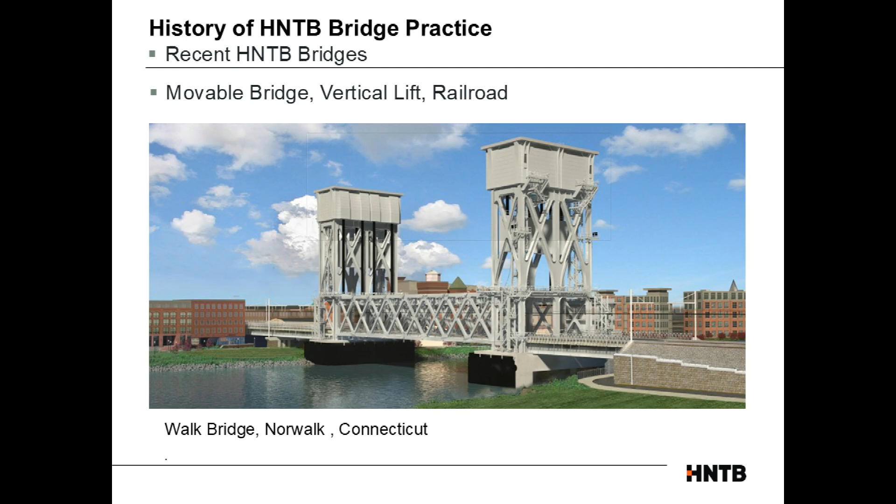At some point we originally wanted to do a bascule bridge, but railroads don't like to shut down—they always want to keep the tracks running. This method allowed them to build over the existing tracks and then switch over in a weekend, carrying 4 tracks. The old bridge was an old swing span bridge that got stuck—it was over 130 years old. Every so often when the bridge was in an open position, the trains couldn't go through because it couldn't move, and all the commuters to New York couldn't get there.

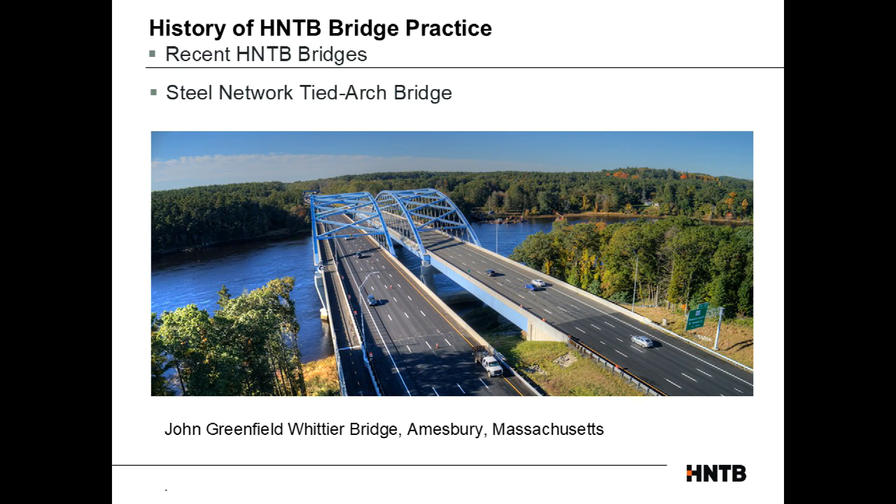So, again, we also do these concrete girder bridges. This is a Jeremiah Bridge in Omaha. And then we also did a lot of rail bridges. This is the Honolulu rail system. And then a steel arch bridge, that was in Massachusetts and then in West Virginia.

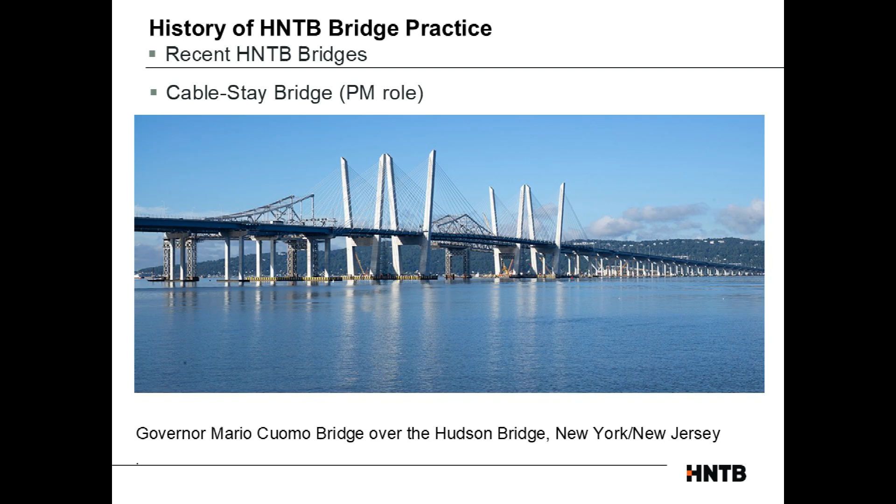We also do some project management work. This is what we used to call the Tappan Zee Bridge, and then they named it the Governor Mario Cuomo Bridge. Then the Gerald Desmond Bridge in Long Beach, California.

And then this is again the K Bridge, we call it the Kosciuszko Bridge. This is the first cable stayed road bridge in New York City. I ended up working on the aesthetic lighting of that.

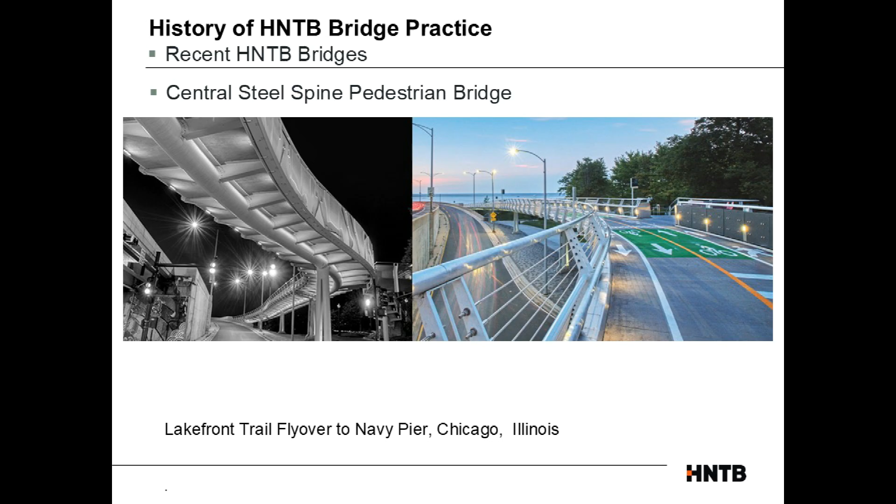And then in Dallas, we built this pedestrian bridge over this interstate. It's an S-shaped type ped bridge that connects two of the trails. If you go to Chicago, there's this lakefront trail flyover that connects to the Navy Pier. This design is almost like a roller coaster. Rather than your traditional straight ones, it uses a kind of pipe system that follows along the whole trail.

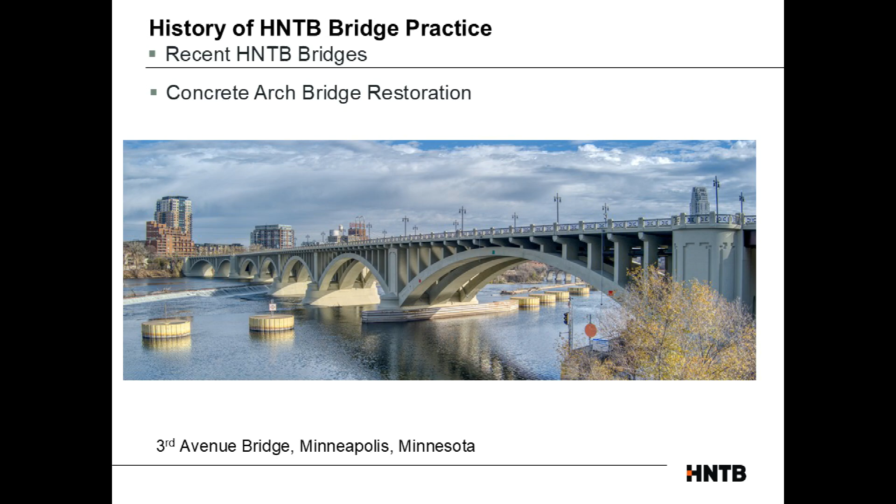And if you go to Washington, D.C., we were also the project managers for the Frederick Douglass Bridge. And then I mentioned historic preservation stuff. This is the 3rd Avenue Bridge in Minnesota that we have also completed. And then finally in Los Angeles, this is the Sixth Street Bridge replacement.

This has been featured in a lot of commercials lately. It replaced a bridge that was really well known, called the Sixth Street Bridge. If you're a fan of Grease, that's where they held the race underneath it.

If you see Terminator, this is going over the LA River. But the bridge that they replaced, even though it was built in the 30s and there were several other bridges, that one had what's called a alkali-silica reaction, where the concrete mix was not that good. It was almost like cancer. So we ended up having to replace it.

And we came up with this idea with a local architect named Michael Maltzan, that rather than just one arch over a river, we just spanned the whole entire thing and called it a ribbon of light.

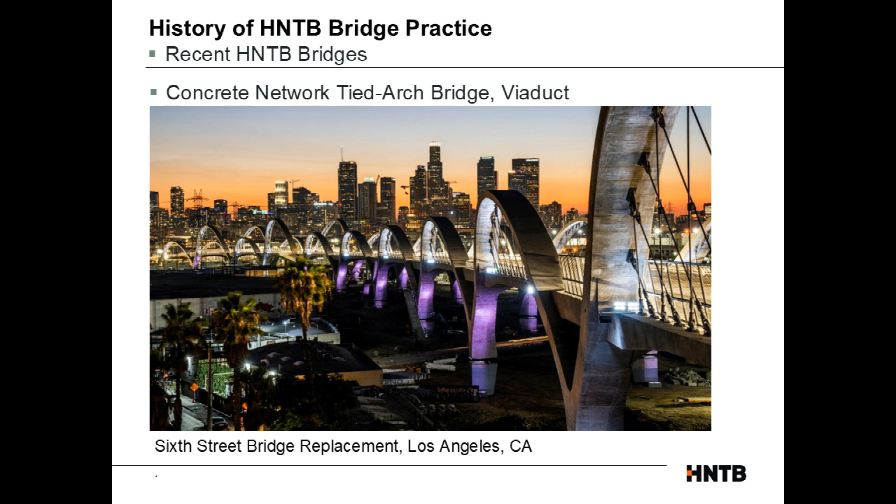Okay, so finally, this is a little bit about our bridge practice here. And this is our current leader named Scott Rude, who had major experience. And I think that's it.

I have 3 minutes to spare. Any questions? Yeah.

I couldn't help but notice the bridge in Louisiana, Missouri. It looks quite similar to the Causeway Bridge over Lake Pontchartrain.

Probably. What's the span? Lake Pontchartrain's like 23 miles. Well, the Mississippi River is not as wide as the Lake Pontchartrain Bridge. That one you're talking about is a whole long corridor going over that area. It is a similar type of bridge, but I wouldn't say the same—the Champ Clark Bridge only has maybe 5 spans that we needed to clear.

We did a bridge similar to Lake Pontchartrain, which is the US 90 bridge in Bay St. Louis. That was a bridge that, I think after Katrina hit, was out of commission, and so we had to go in there and try to rebuild it.

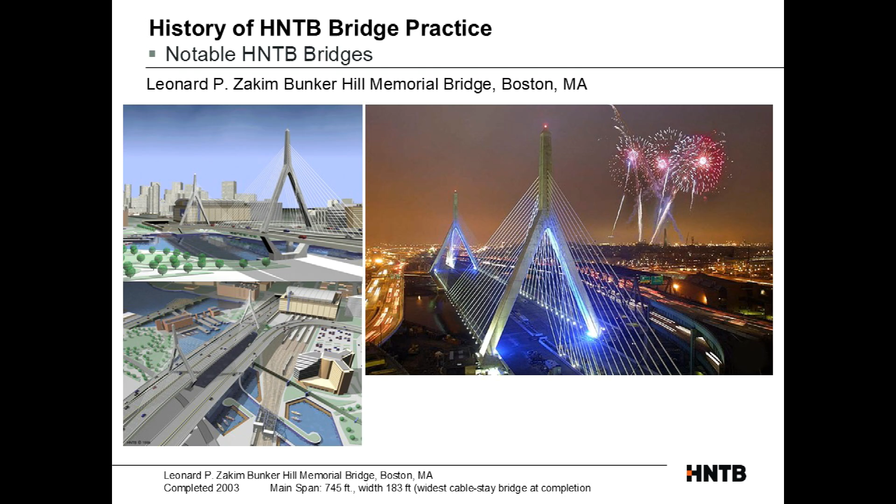Each of these cables are supporting that deck, that's really what it comes down to. But unlike a suspension bridge, like the Golden Gate Bridge, which has a suspended cable between the towers and hangers going vertically down, with this one all of the loads are going straight to the tower to hold up that deck. Now they're using computers to really calculate exactly what you need to do to hold that weight.

Aesthetically, that's something that does give a nice look to it, but it's not just pretty pictures. There's a lot of engineering about how much they have to do, how far can they span it in order to get there.

I have a question about temperature. The temperature would make a big difference in the length of those spans, right? When it gets hot, when it gets cold, they expand and contract.

I'm not the engineer for that, but each of the cables are designed accordingly—they allow for expansion or contraction. I don't know if heat is really the major factor. I think it's wind. In terms of bridges, we have to design for dead loads, live loads, and then when you get to earthquakes, there's also seismic that you have to deal with.